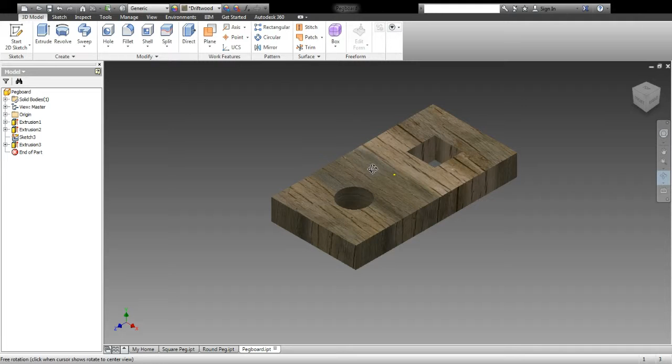All right, the last part you should have made would have been your pegboard that you see here. Remember, you should have ended up with two holes in it that would have been centered on the horizontal and then the vertical going across.

Moving through our packets, the next one we need to make would be the mallet head. The mallet is made up of two parts: a custom design mallet head that you create, and then the handle of the mallet. So we're going to start by creating that new part file and work on the mallet head.

The mallet head is a simple rotation. So if you look in your packet, they show you a sketch that you could end up with, or something that you could make. First thing we need to do is be realistic about the size. The pegs we've been making have been about 3 inches long, so it doesn't make sense to have a mallet that's 3 feet long.

So we're going to start by doing a 2D sketch, and we can choose any plane that we want to work on here. And we need to make that center line. The center line that we're going to make is going to determine how tall your mallet head is, or what the length of your mallet head is. So if our pegs are 3 inches long, we might make a mallet head that's 3 inches long. Then you can set what you want it to be. I'm just going to put it at 3 inches here. And then we can finish our sketch.

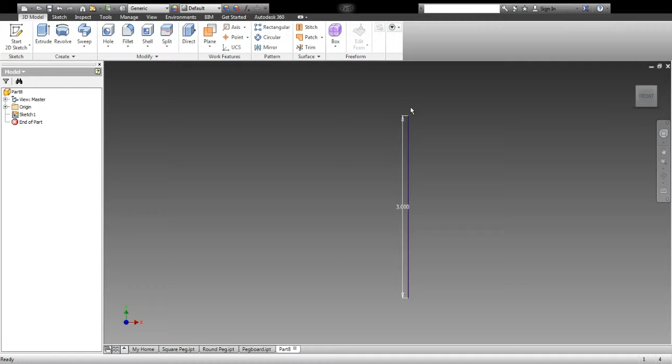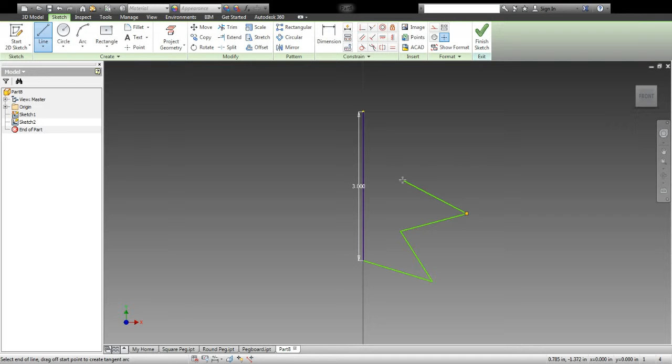So I'm going to put in lines here, and start connecting them. And I could do something crazy. All right, so there's my shape. I can finish it. And then I'm just going to do a revolution of this shape around this axis, 360 degrees. And this is what my mallet head would therefore look like.

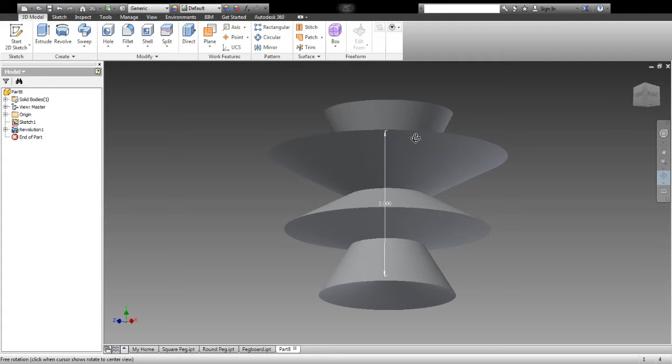Now, if I'm thinking in terms of actually engineering this, I don't have a really good spot on here to attach the handle of my mallet, a good spot to drill a hole to screw a handle into. So I might reconsider what I want to do. I'm going to click back a little bit here.

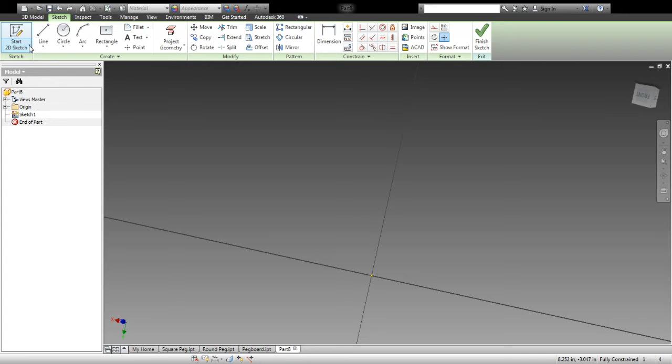I'm going to do that 2D sketch again, and this time, I'm going to do that same 3-inch line to get me started. Just going to zoom out a little bit here so I can see the whole thing. That same 3-inch line to get me started.

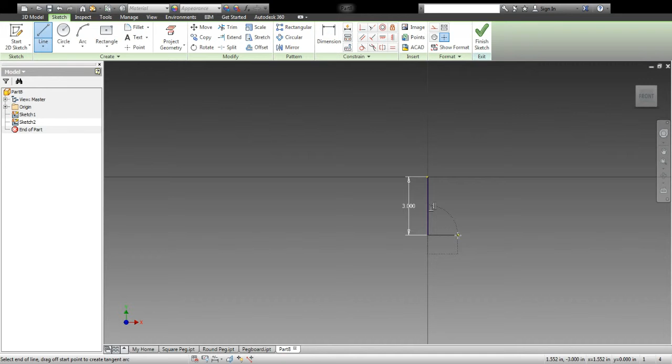And then I might go crazy for a little bit, but I need a flat side that I'm going to pound these pegs in with. So maybe I do a crazy part, and then I do a straight part that I could put the handle on. And then I come out again, and then I go in. Let's see what kind of hammer that would end up with.

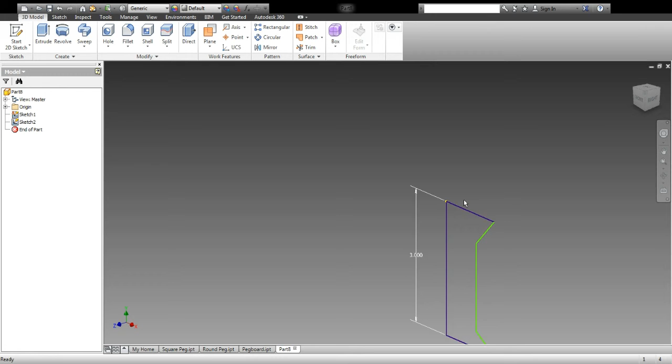So I'm going to finish the sketch. Zoom out so we can see what we're doing. I'm going to revolve this shape around this axis and click OK. Now I have something that looks a little bit more like a hammer. So I would have two flat sides that I could actually use to pound things, and then this part in between is going to be where I'll be able to attach my handle.

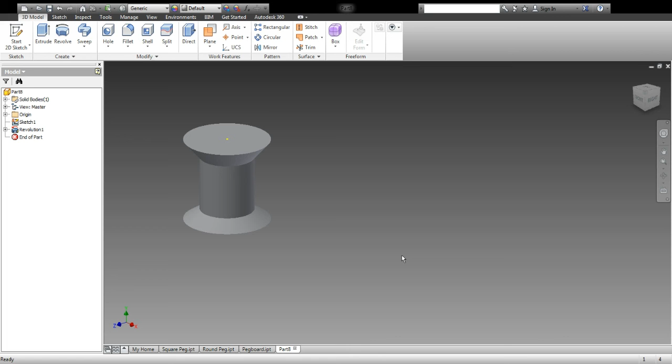We can do all sorts of stuff when we make our hammers, so don't limit yourself. Just think about, does it make sense, what I'm doing, and am I actually going to be able to use that as a hammer? Am I going to be able to attach a handle to it? Have fun designing your hammer. It certainly does not have to be the one that's in the packet. Just make sure that you're going to be able to do the next parts.